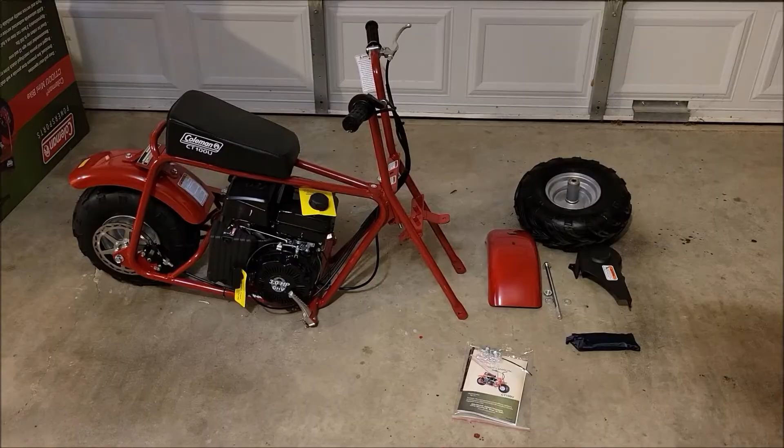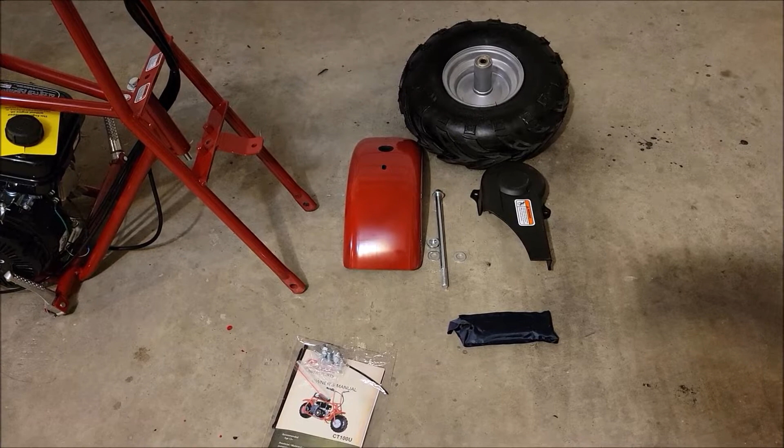So here is some video of it now off of the cardboard platform that it was sitting on and the plastic removed off of it. The main unit here is pretty much all put together except for, it looks like a chain cover there that goes over the clutch. It comes with a little tool set, and it comes with the front axle, which is that big bolt, the manual with some extra bolts, the front fender, and the tire. So you're mostly assembling just this front fork system for the bike.

There are a bunch of little things on here that say, hey, it's shipped without oil. Make sure you put engine oil. Don't crank it without oil. They say it over and over.

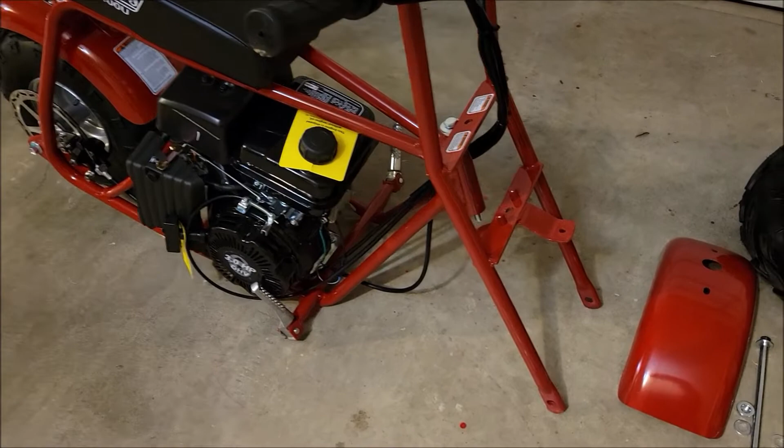I do like the fact that they have the VIN actually stamped all over the place, and they have a little VIN plate on the back. That's pretty cool. Big comfy seat.

Looks like the seat will handle a decent sized butt on the bike. It's a short statured bike. I had already sat on one of these before, so I knew it was a smaller framed bike, and that was fine with me. You'll look like you're riding a circus bike, but that's fine. I do plan on buying one of the bigger frame bikes also though.

But that is pretty much how it comes when it needs assembly, so you can see what you have to do to assemble it. I'm gonna go ahead and start putting it together.

I'm sure the manual has good instructions on how to put this thing together, so I'm not gonna go through every one of these little pieces on how to put it together. Read the manual and figure that part out. If you're getting one of these, you probably need to know how to do the basic mechanic work on it anyway. So that package of booklets that's in with the bike definitely has install instructions.

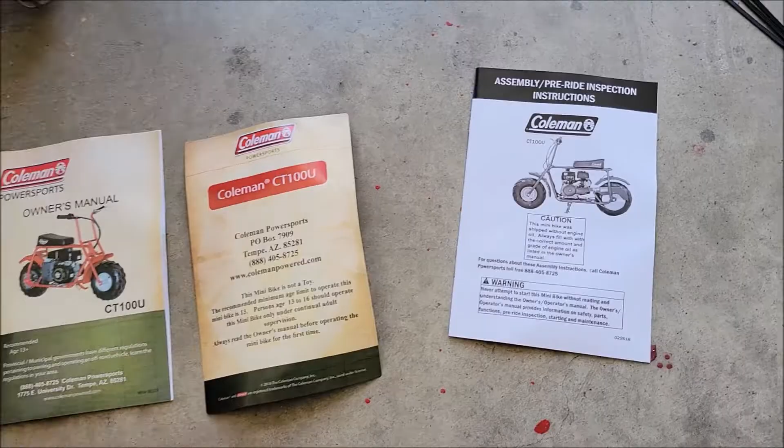I've flipped through that already. It's a very good manual in good English. You can understand it. You should have no problems if you follow the instructions precisely putting this thing together. It's not that big of a book, and it's really not that much you have to do. It just may take me 20 minutes, I'm thinking.

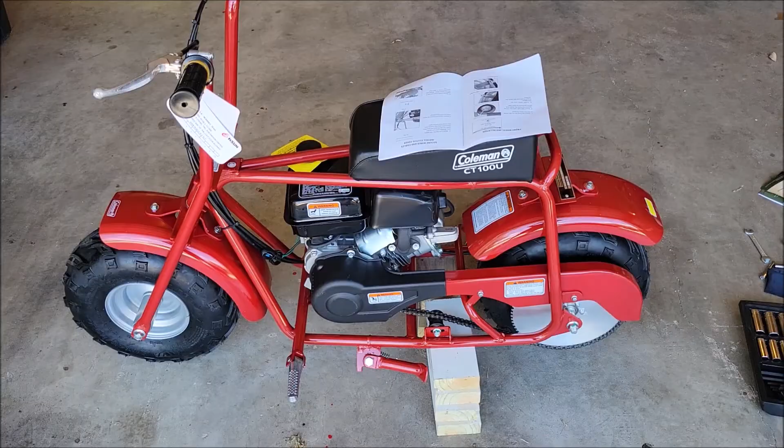All right, so now that I have it fully assembled, let me give you some tips so that way it hopefully makes it easier for you.

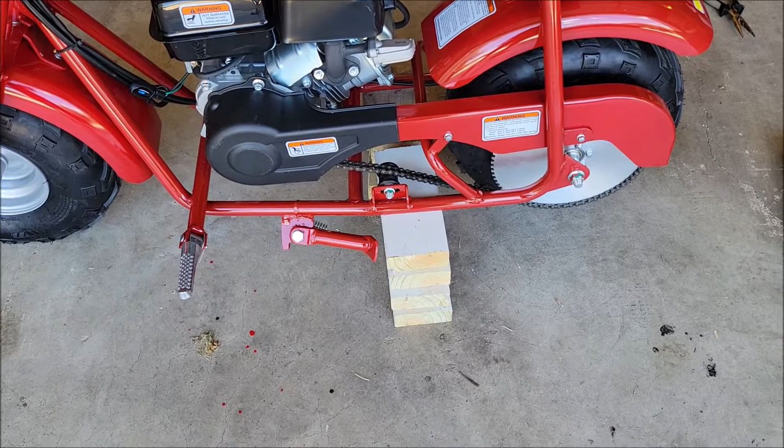The first thing I recommend before even getting started putting this together is to find yourself some pieces of 2x4 or 4x4 or whatever, and cut yourself some little blocks to lift this thing up. So if you look at this, this was a 2x4 that I had chopped up. I put 4 pieces on each side.

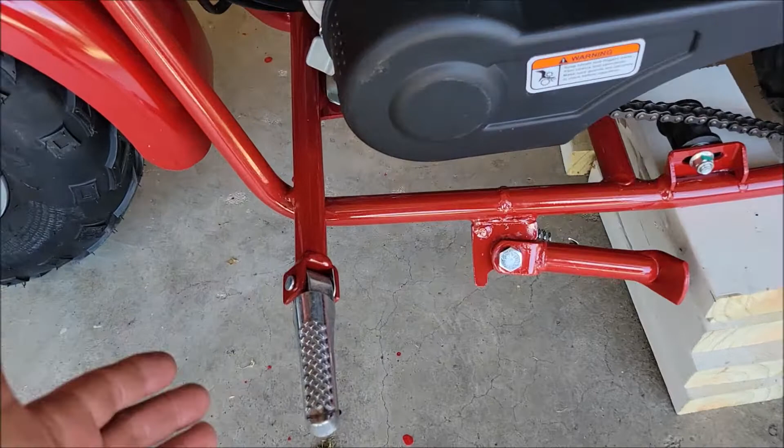So what that allowed me to do is, in the beginning, when I needed to install the front fork and I needed to put the fender on and the tire and everything else, I was able to put these blocks right up underneath here, and it suspended this whole bike up high enough where I could put on the forks and the fender and the tire and everything without having to suspend the bike up by hand.

That right there held it up no problem. Then when I needed to shift to the back brake caliper, I was able to just move the bike, like you see here, with the blocks below it further to the back. It lifted that rear tire off the ground and let me easily work on that brake caliper and get it adjusted properly. So if you have a few pieces of wood that you can chop up to make yourself some blocks, that will help tremendously when trying to get this thing assembled.

It's easily a one-person job. You don't need another person in here to help you do it. You just need to have the right tools to get it put together properly.

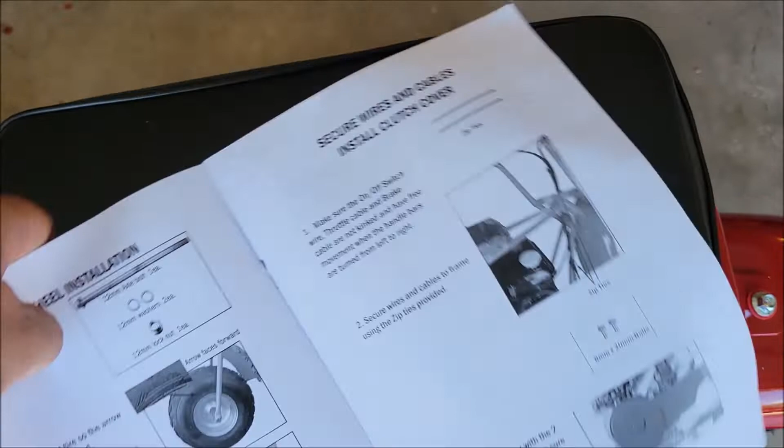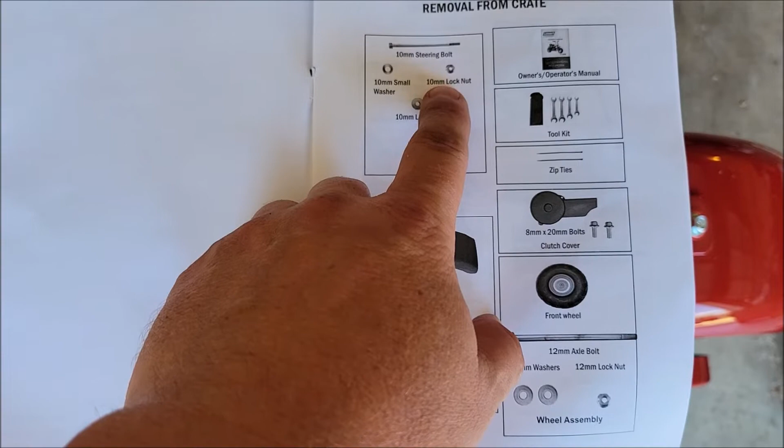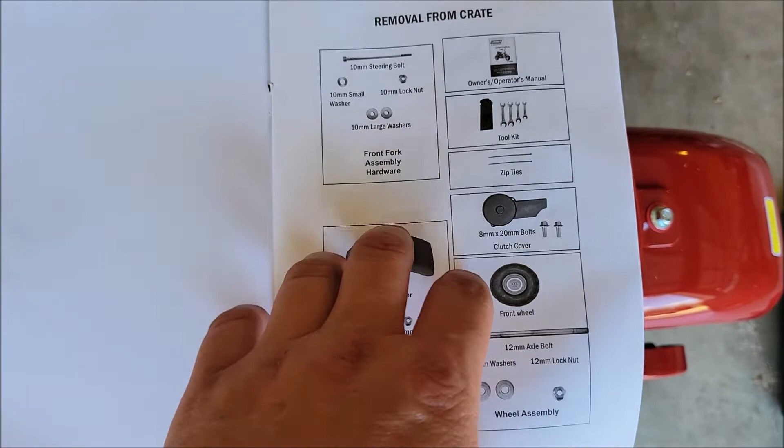So the book is pretty decent. You start out by checking to see if you have your parts. Do this step. I was missing this 10mm lock nut, which is for the steering wheel, and I had to run to Home Depot and buy that nut there. Luckily, there was nothing major missing, and I was able to easily find that nut. That's all that I was missing, but check this first to make sure you have all your parts before you ever try to get started and do something wrong.

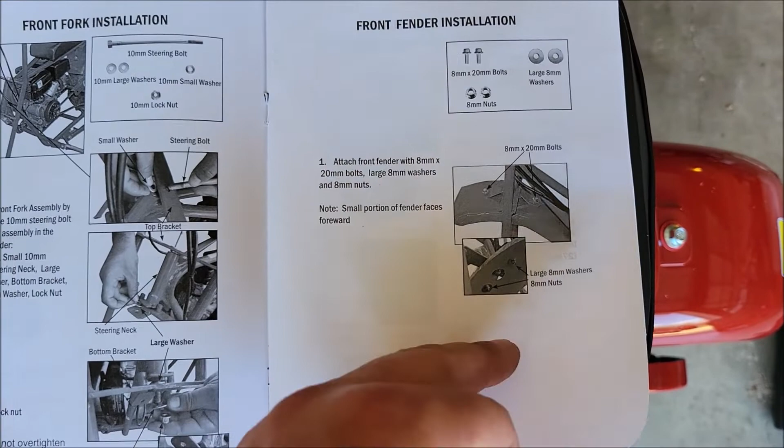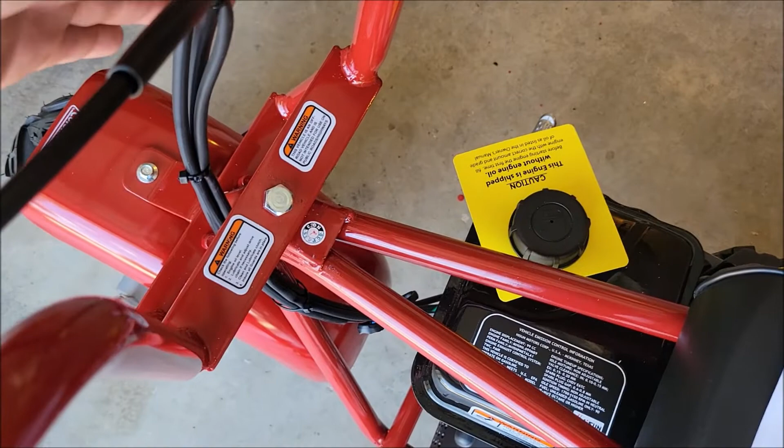Once I had the nut, the fork installation was fine. The front fender installation, again, fine. Front wheel installation, fine. All of those were easy. Securing the cables, again, pretty easy. Just make sure your cables are routed properly and they're nowhere they can bind, and that your steering wheel will move back and forth. That was fine.

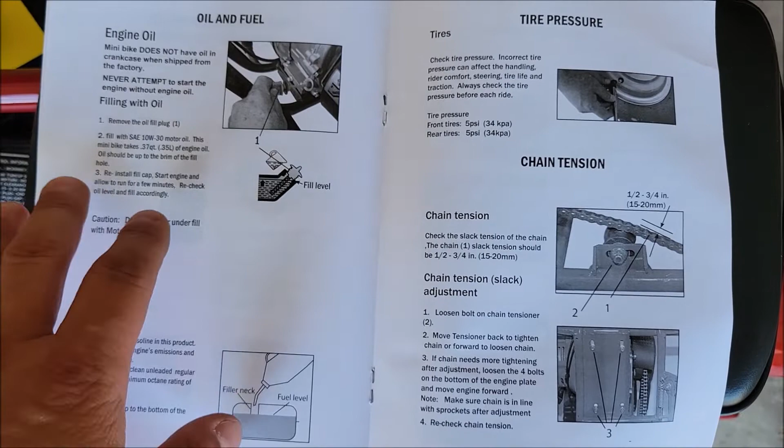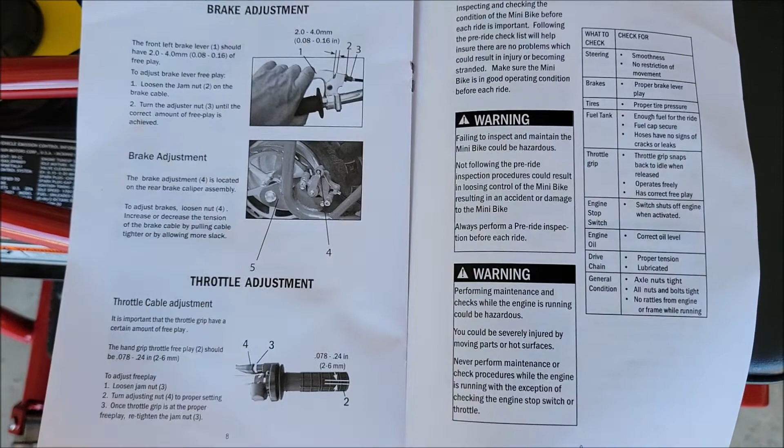Get to oil and fuel, that's what I'm doing now. I haven't put that in there, but again, that's fine. Tire pressure's fine, chain tension even came fine. But when you get to the brake adjustment, the brakes, at least on mine, are all out of whack. So expect to completely redo the brake adjustment.

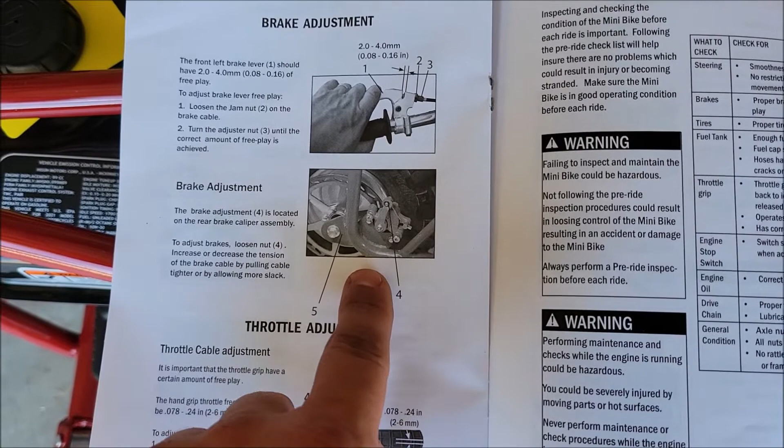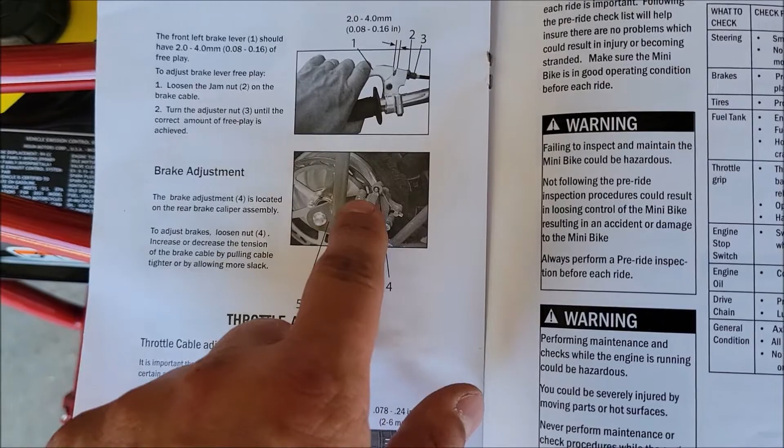And if you follow these instructions, this right here makes no sense. All of it's clear except 5 and 4 don't even point to the right thing. The only adjustments you need to do are this Allen key bolt and this Allen key bolt. Let me show you on the caliper what that looks like.

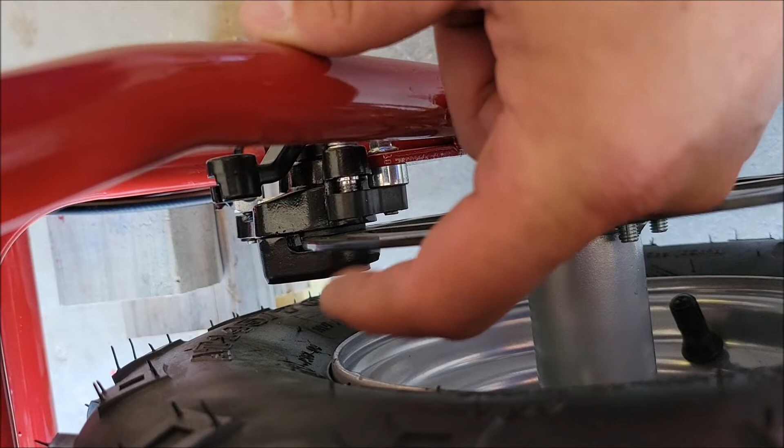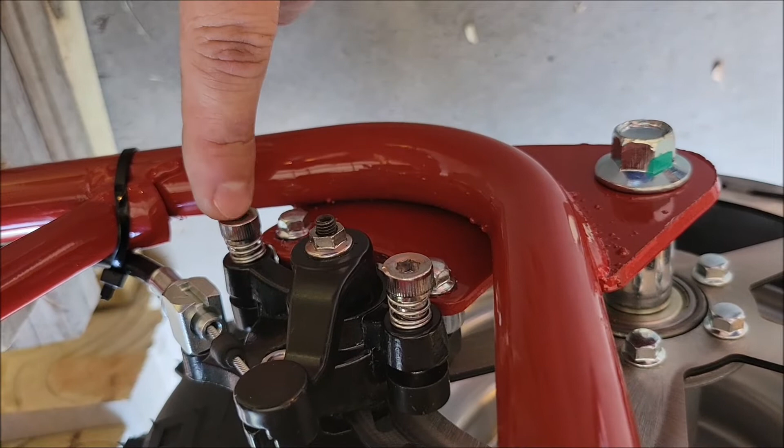So if you look at this rotor, it needs to be nice and straight, and you need to be able to pick this thing up by hand and move it pretty freely. There's going to be a little bit of grab because of the chain, but this should turn pretty freely. This rear wheel was practically locked up when I got mine, and it's because this brake adjustment was way off. The whole rotor was kind of bent a little bit because of how this brake caliper was put on. Now there's 2 screws or bolts, this one here and this one here, and they both take an Allen key style key to go in there and adjust them.

What these 2 things do is move the back side of the brake pad and the front side of the brake pad, so they literally adjust this entire caliper back and forth. All I had to do was adjust these 2 to make it where when you look down this rotor, you can see a very thin gap. You probably can't see it in the video, I don't even know why I'm doing it, but you want to make sure you can see a little bit of space behind the back brake pad and the front brake pad, which means they're not touching the rotor. They're just lightly off the rotor, and then you can spin this freely.

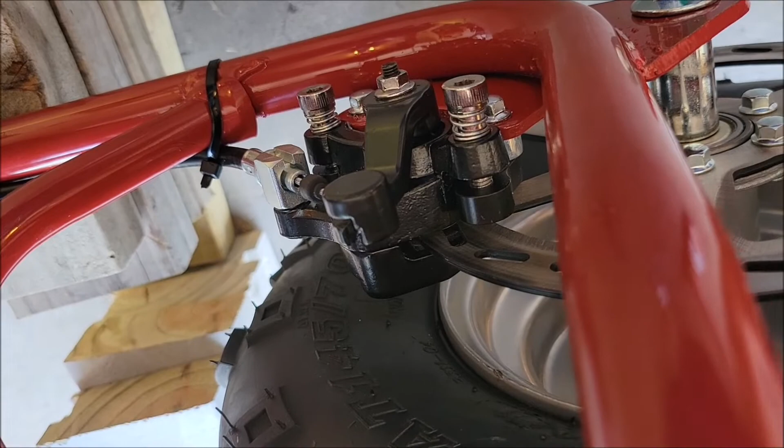Now, of course, you don't want them too far off, and they won't be, unless you have a ton of play in this cable, where when you squeeze the handle they don't stop you. But I have it set right now where if you just barely squeeze that handle, they grab and it stops with no problem. But when that's off, the wheel spins freely.

That's very important, because if this thing is binding up, even if you can give it gas and it'll go, you're wearing out your clutch, using way too much fuel, burning up these discs and this rotor. You'll be very low on power and probably not happy with the machine. But if you have this adjusted properly and the rear wheel spins freely, you should get all the power you need and be able to get top performance.

It comes with all the tools you need to tighten it down, except for the Allen key to adjust the rear brake caliper. So when you go to adjust that, you'll need a set of Allen keys if it's not already adjusted out of the box. Mine was not — it was way off. But the chain was tensioned fine, the cables were run fine, everything else was done with no problem.

I was able to just bolt it up, put it together, and here we are. So now I'm fixing to put oil and fuel in it and crank this thing up.

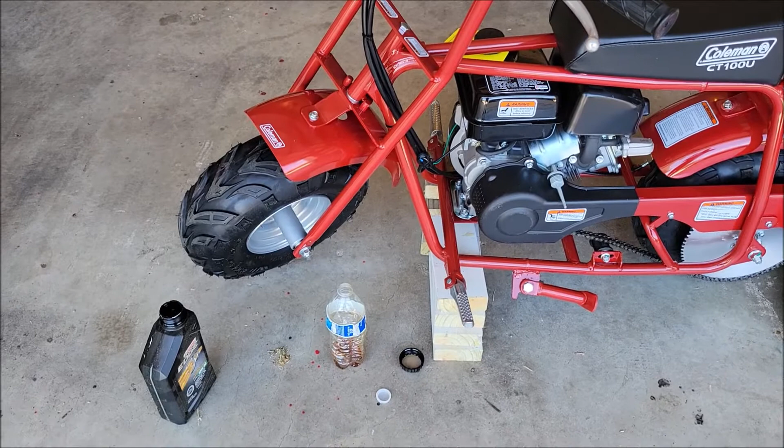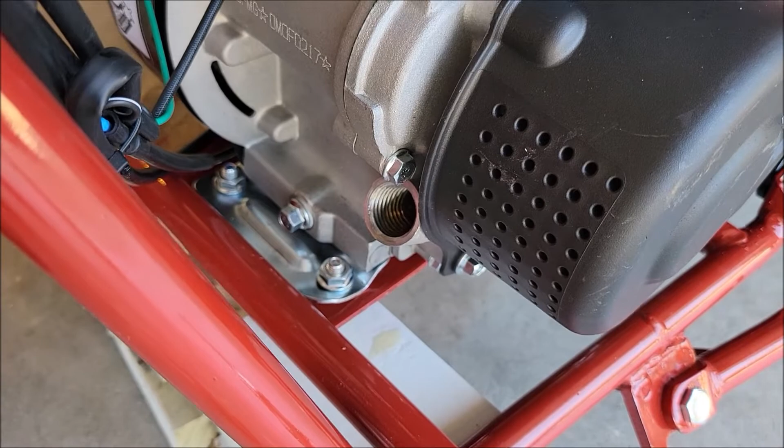Here's another tip. If you don't have a funnel — I sadly have tons of funnels, but I never seem to have them when I need them. I even have one of those hoses that attaches to the top of an oil container and lets you squirt the oil in, but none of them are here with me right now. So one easy way to do this is if you have an empty disposable water bottle, you pour your oil in that first. That lets you get into that spot in front of the motor and pour the oil in easy enough to see and make sure it's nice and level. So that's just one tip — if you don't have a funnel, just use a little water bottle like that and fill it up.

There's a sticker on the back fender that says, 'Do not return to store. Call Coleman Powersports for any problems.' So if you have an issue with this, there's who you need to call.

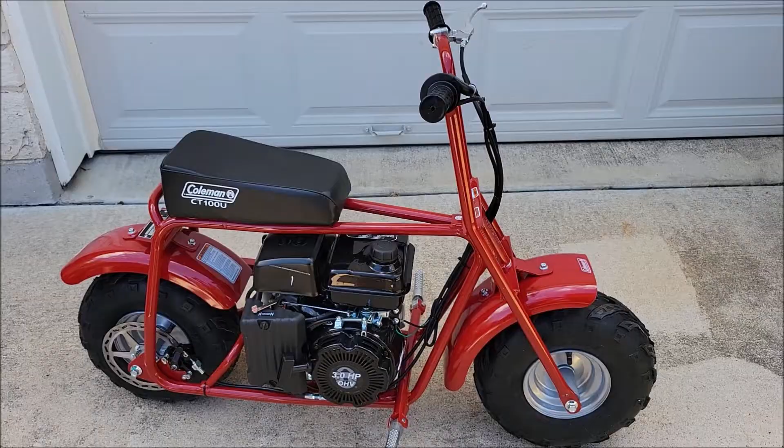Now that it's all put together, we're going to go give it a test drive. It's gassed up, it's got oil and gas in it. Didn't take much to get it cranked — just put some gas in it, pull it a couple times, and it fired right up. You gotta make sure you have it set to start here, not on the kill switch.

I just cruised it through the neighborhood a little bit, and the max speed, I actually hit 20 miles per hour exactly — that was my top speed. Most of the time my max speed was 19 miles an hour, but there was one part, probably downhill, where it hit 20 miles per hour.

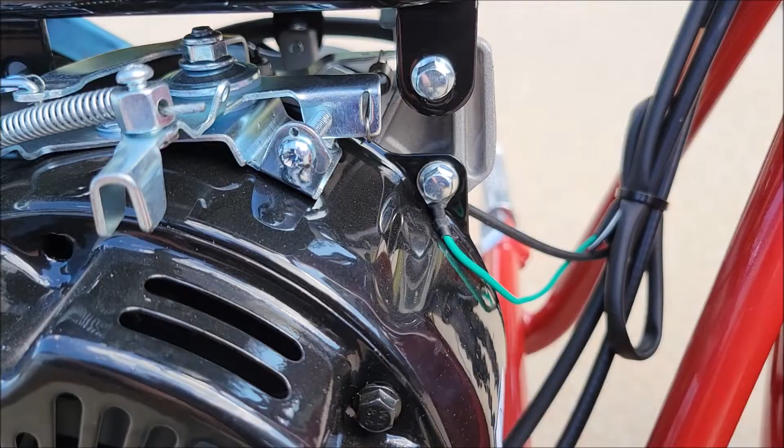So I got down here and tried to unscrew this throttle screw and it wouldn't turn — it just started stripping, and I was wondering why. So I looked at it closer. Look at that, they welded that screw in there. They do not want you to adjust that throttle screw at all.

So here's my disclaimer: don't do as I do. You should listen to the manufacturer.

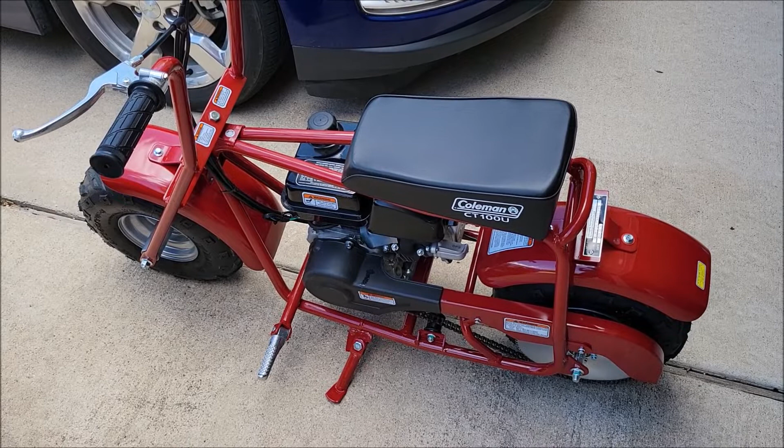But I'm fixing to cut that screw off. I looked at how wide the carburetor opens when you turn the throttle, and it's pretty much coming all the way open. I did bend the screw back just a little bit to get the carburetor completely opening with the throttle, but it doesn't seem to give me much more speed. So it looks like, stock, just the way this thing is shipped to you, it's got a 20-mile-an-hour top speed.